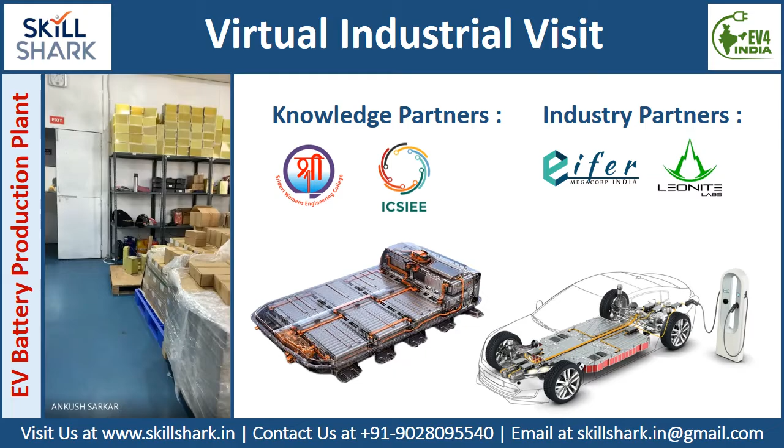So this is our production line. I understand my voice is very low because we are here at the production floor and there will be so much disturbance, those might be the possibilities. So I'll try my best, you guys can have a listen.

So this is another machine. What happens is once you put the cells, you sort those cells, you put them over there, and from there, there's a systematic way that the cells are processed. Do you want to see the working of the cells? Just hold on a second.

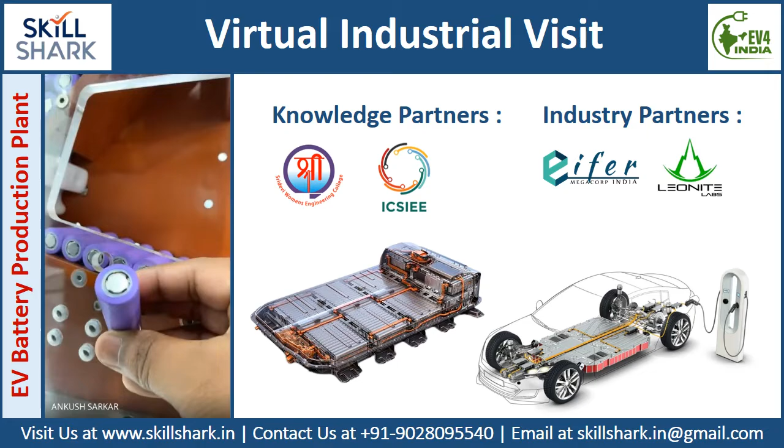So you can see, these cells are without gaskets. Just hold on a second, these cells are without gaskets. So our aim is to get safety cells like this.

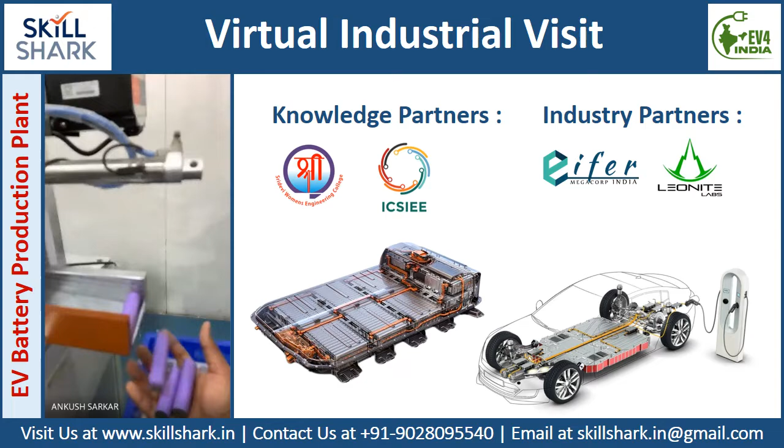So this happens now. This is used for putting the gasket for the safety purpose of the cell. This is the second stage where we put safety gaskets.

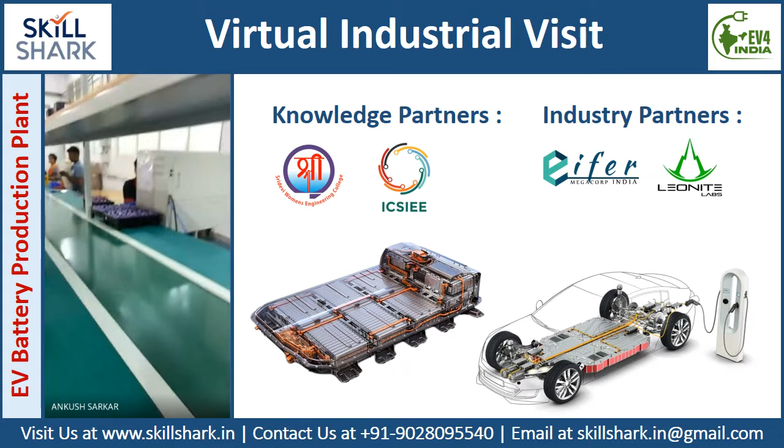Now these cells then go to child assembly. This is our conveyor. You can see these people are making some child assembly for the battery packs.

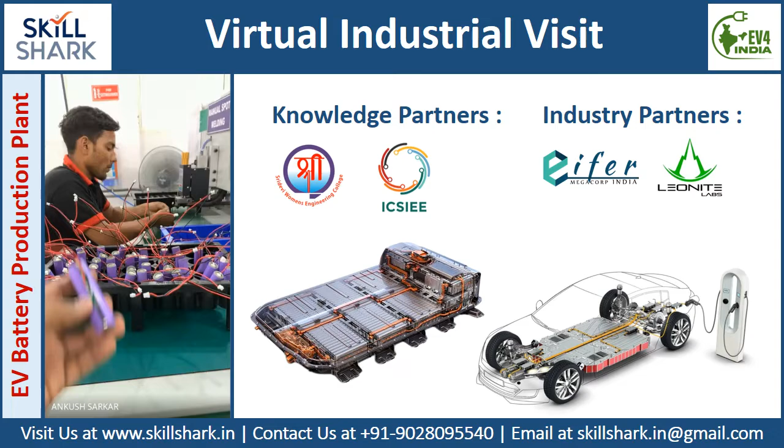There is another assembly. You can see these are single cells that we put for checking the quality, and we put BMS for the systems.

So these are energy storage packs, which are used in home base applications. Actually, these are used in home base application inverters, where you put these packs into the inverter and it can power run your whole flat for say a couple of hours.

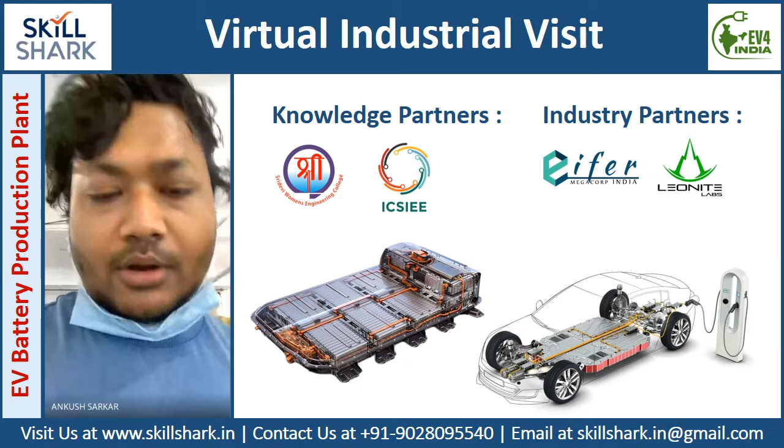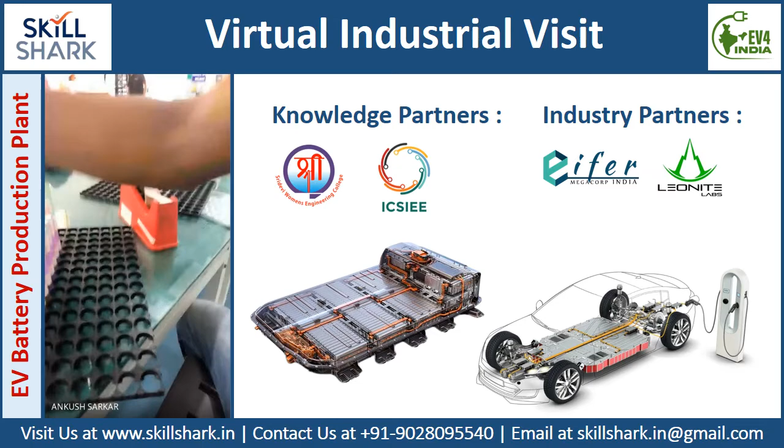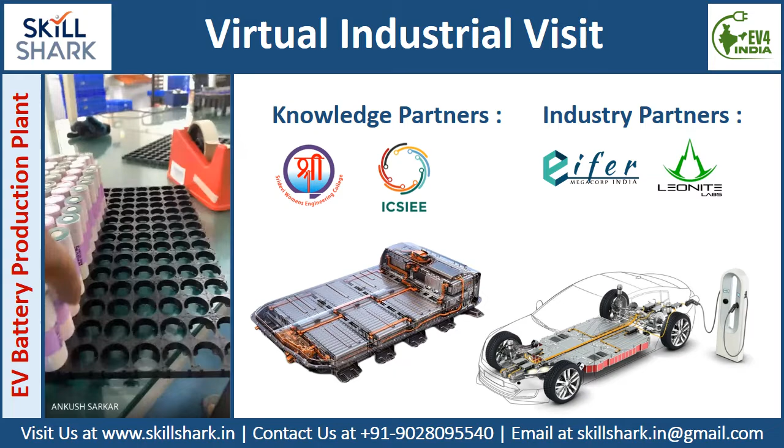Series 1, series 2, series 3, series 4, series 5, series 6, series 7. So these trays generally come from here, from the machine which you saw from there. From here, it goes to that branching machine, and now it goes to this point.

Now what happens is there is another thing which we call spot system. You can see these are big cells.

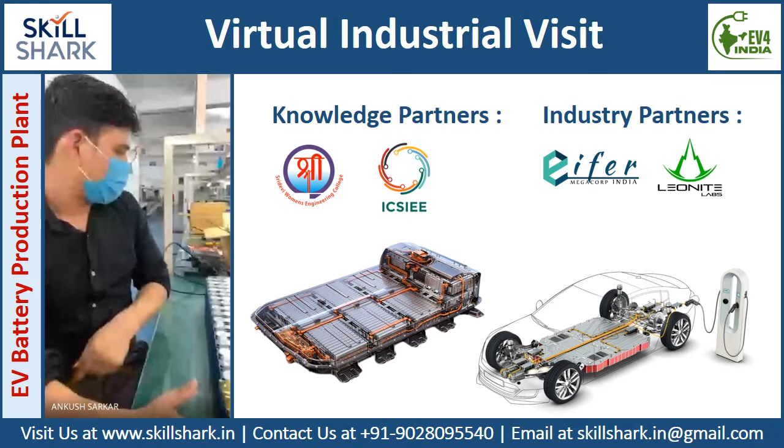So, can you send me some? The 60 volt and 36 Ah capacity battery. 60 volt and 36 Ah battery.

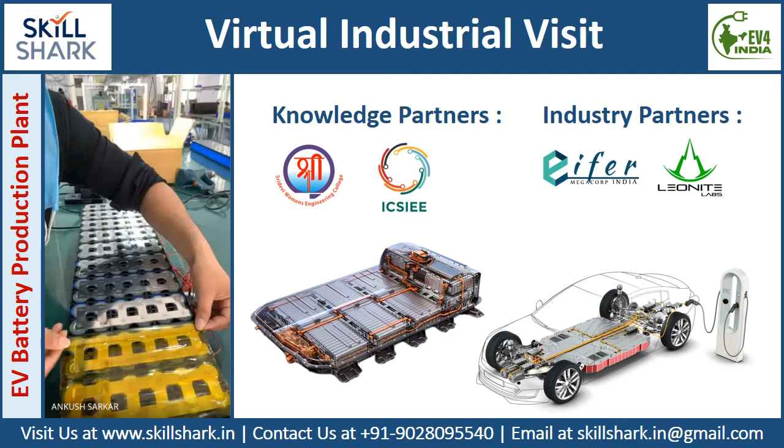So we are putting this, this is a kapton tape he is putting. The reason for putting it is that it has very good insulation in the pack. You can see we can put hand in this, but we cannot put in this. It will shock, so we generally put this.

So these are some balancing wires we generally plan up. So these are things, and you can see this is ours. This is automatic spot welding.

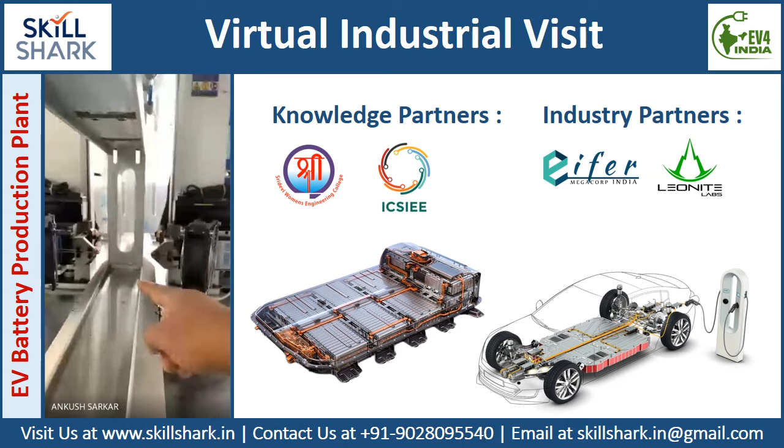So this is an automatic spot welding machine. What generally happens is it has electrodes, both electrodes, so it generally punches the cells. It can do around 100 cells in 10 seconds. So it is that fast, you can see.

These are things which are coming up, and apart from that, I'll take you to the next step, how those cells are being sorted. This is called the cell sorting machine. What this function does is, this guy is doing cell sorting on the machine.

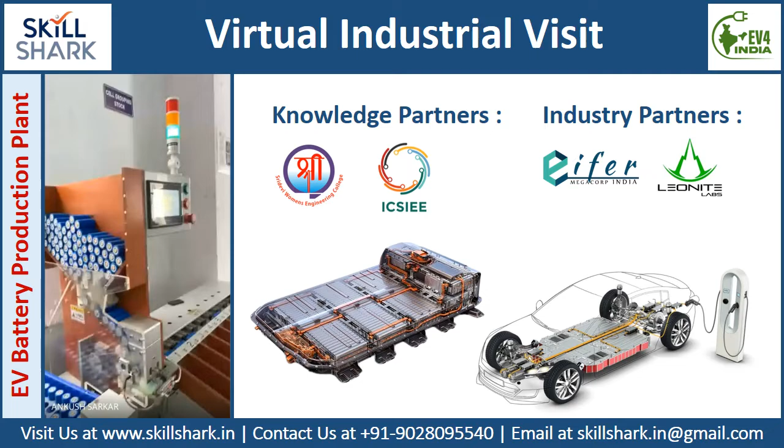Just hold on a minute. He is only doing that.

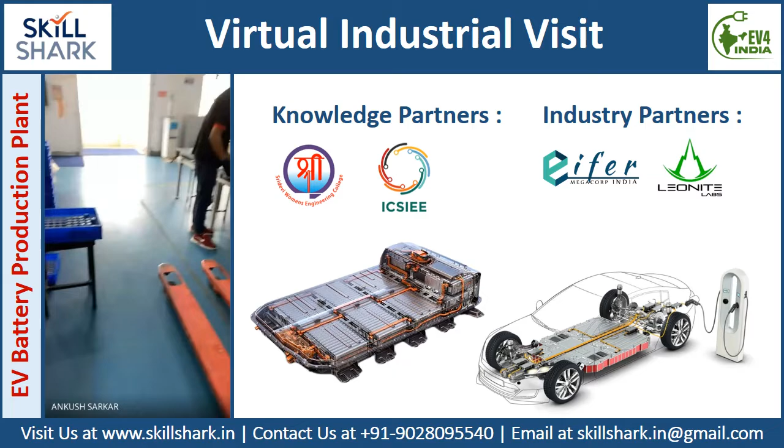So generally what it does is it gives you the best cells from this management system. That means when you put these cells inside, it automatically goes to this point and then suddenly it reaches the place. That's how these cells are being stacked.

So it is going for the final packing, and you can see.

Now I'll take you to the wire stripping machine. You can see this is another wire stripping machine.

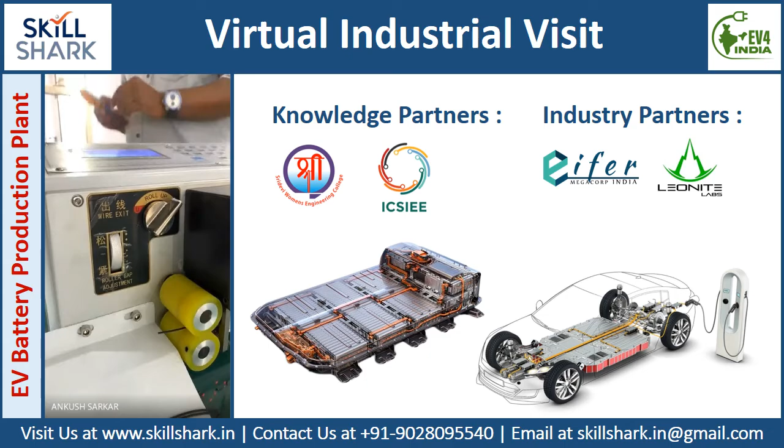So these are some things that we generally do in our industry. So now what happens is, like when we make a battery pack for our electric vehicle, we generally...

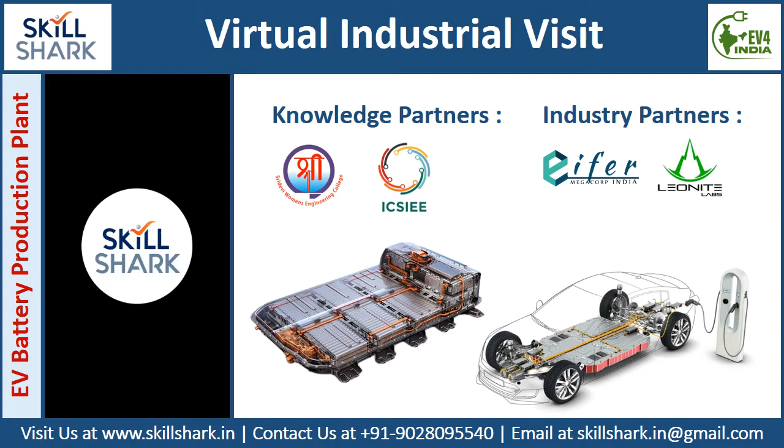You are making batteries for all applications, right? Yes, for all—two-wheeler, three-wheeler, and we have some plans for Dubai, with electric buses coming up. We are pretty much confident, and apart from that there are some other things we are picking up.